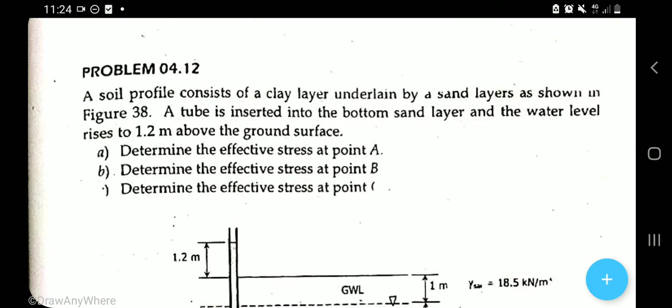A soil profile consists of clay layer underlain by a sand. So meron tayong soil profile, merong clay layer at merong sand. Dalawa yung ating soil layer, isang clay at isang sand. And layer as shown in the figure 38. Yan yung natin. So yung clay nasa ibabaw and yung sand nasa ilalim.

Okay, and a tube is inserted. So as you can see, ito yung tube natin. Yan, yung may 1.2 na yan, ito. So inilubog hanggang dun sa may sand layer, okay? And a tube is inserted into the bottom sand layer and the water level rises to 1.2 above the ground surface.

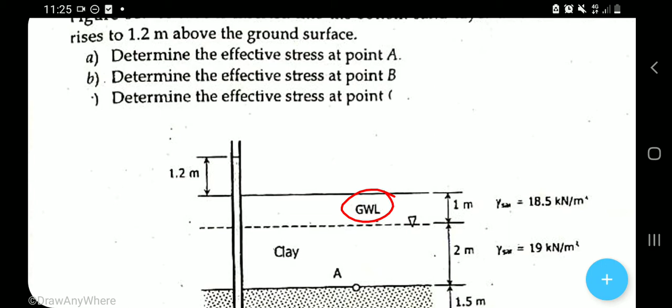So nung nilubog daw yung ating tube, ang nangyari ay tumaas yung tubig hanggang doon. Nung sinukat ay merong 1.2 meter from the ground level. And given sa figure, yung ating GWL or the groundwater level. So initially, yan yung kanyang groundwater level.

At tandaan nyo na kapag kailangan ay mga effective stress, mga stresses in soil, kailangan niyang ating mga unit weight. Unit weight ng bawat layer. If it is saturated unit weight, moist unit weight, or the buoyant unit weight, kung anong given.

So in this problem, ang given ay saturated unit weight sa part ng sand ay 17 kN per cubic meter. Sa sand layer yon. And 19 kN per cubic meter dun sa clay below the water level. Okay, below the water level. Ito, hanggang dito lang yung kanyang saturated unit weight.

At nasa figure na itong 18.5 ay dito sa part ng above the water level. So below 1 meter ground, yung ating tubig. And 18.5 kN per cubic meter yung saturated unit weight nung clay layer doon.

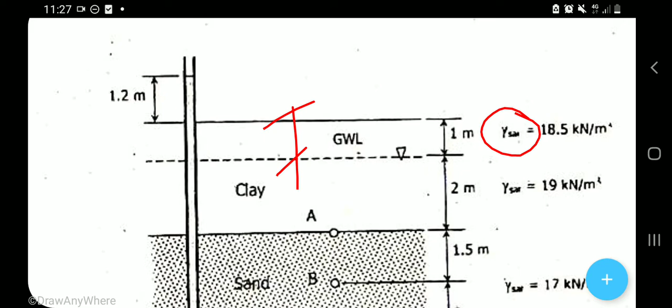Okay, kung natatandaan nyo, magiging fully saturated yung kanyang unit weight kapag lubog sa tubig. So dito sa problem na to, hindi in-indicate kung ito ba ay 100% saturated. Pero ang nakalagay dito is saturated unit weight, meaning to say, fully saturated siya. Hindi lang sinabi kung due to capillary rise, the clay layer above the water level being saturated, fully saturated. Hindi sinabi. So i-assume na lang natin na dahil sa capillary rise, nagkaroon ng 100% saturation dito, so 18.5 kN per cubic meter.

So sometimes there is no capillary rise, so minsan yan ay moist unit weight lang, mamasa-masa lang. Pero dito sa figure, ginawa niya kasi na saturated siya.

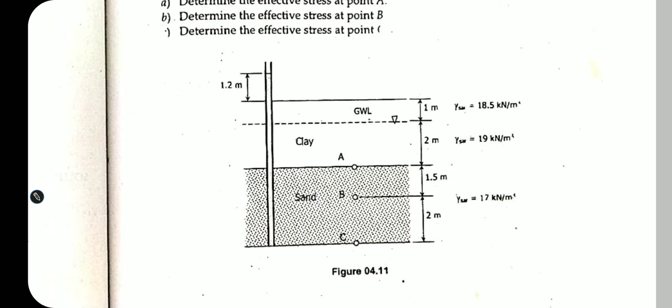Okay, and meron tayong mga point dyan kung saan pinapahanap yung mga stresses natin: point A, point B, and point C. So analyze natin kung ito ba ay without seepage or with seepage. Tandaan nyo na without seepage siya kapag yung water dito, halimbawa, ay lumibel doon sa groundwater line natin. So without seepage yon.

Pero pag ganito, ang nangyari dito ay mas nagkaroon ng head difference, head difference between the groundwater level and the reading dun sa tube. So meaning, meron diyang pagdaloy, may hydraulic gradient yan, may pag-flow of water dyan sa ilalim. Ibig sabihin, may pressure dun sa ilalim dito. Okay, so yung clay kasi parang mas nag-serve siya as semi-impervious material layer, kaya nagkaroon siguro ng pressure difference, yan.

So kapag ganyan, ang tendency niyan mas tumaas dito, ibig sabihin yung flow of water dun sa ilalim is pataas, upward seepage. Kumbaga ano, so gaya nung diniscuss natin na kapag yung water level dun sa piezometer o kaya kung anong tube ay mas mataas dun sa original groundwater level, ang ibig sabihin nun ay yung flow or seepage is upward.

While kapag naman mas mababa, halimbawa, hanggang dito lang siya, hanggang dito lang yung tubig, and the original line level is hanggang dyan, so mas mababa doon, ibig sabihin the flow of water or the seepage is downward. Okay, but this time in this problem, upward seepage siya. And during the upward seepage, tinatanong tayo ano daw ang effective stress sa mga point na yan.

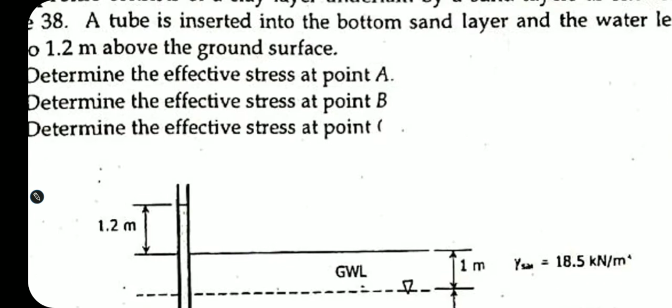Yan, ano yung effective stress sa mga point na yan. So determine the effective stress at point A, point B, and point C. Okay, unahin muna natin sa point A. We all know that the effective stress is the difference between the total stress at any point and the pore water pressure, or the neutral stress, or the stress induced by water.

So dito, sa point A muna tayo. Okay, and since merong head difference dyan, so hindi natin pwedeng hindi lagyan din ng tusok na tube. Kasi kailangan nating malaman yung pressure head difference dyan. Okay? Kasi upward seepage siya, malamang sa malamang ay tataas ang tubig dyan pag tinusukan natin ng tubo dyan. Okay? And yun ang kailangan natin kasi kailangan natin yung pore water pressure para makuha yung effective stress. Yun ang i-minus mo di ba?

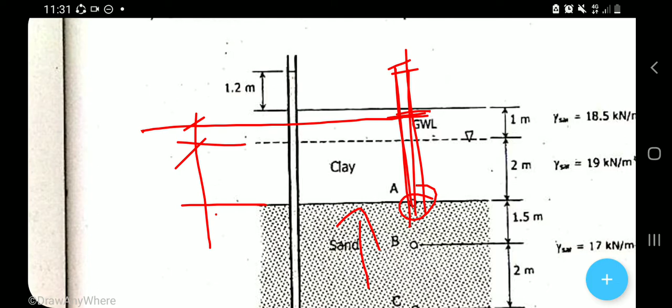And para makuha yung pore water pressure at point A, so kailangan natin ng head reading dyan. Head reading. Kailangan mong malaman to - yung difference ng level dito sa tube na ilalagay natin and the original groundwater level. Ayun, yung maliit na yan. Kailangan nating malaman yan, H sub A, sabihin na lang natin ganon. And ang kailangan nating head para makakuha yung depth para makuha yung pore water pressure at point A, so kailangan natin yung total height niya hanggang dun sa point A na yon.

So sabihin na lang natin na H prime A ganun. So basta yan kung ano man yung gamitin. So tusukan natin. So ganito yung mangyayari diyan. Nagtusok siya ng tubo sa point A lang muna tayo, and the tendency of the water level inside the tube is to rise. Kasi upward seepage siya, to rise. So assume natin na yung H sub A ay ayan, H sub A - yan yung head difference between the groundwater level and the head reading at the tube na inilubog dun sa point A.

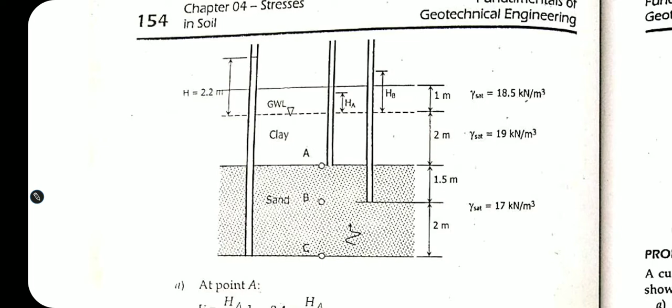Yan. And para malaman yan, so by continuity equation, yung ating hydraulic gradient is the same sa lahat. Yung I dito, hydraulic gradient dito sa part na to, is the same doon and the same also doon, kahit saan - continuity equation yan. So at point A, ang kailangan muna nating makuha, siyempre, yung overall hydraulic gradient, yung tutok dito sa baba - yung tutok dyan sa baba ay ditong point na yan, yung tube na yan. So kailangan natin kunin yung hydraulic gradient dyan.

So, hydraulic gradient dyan is H over L, difference in head ng groundwater level and yung reading. So 2.2, yung naka-indicate, and over L, yung distance kung saan nag-travel yung kapal nung aquifer, kapal nung layer kung saan nagdaloy yung tubig. And ang kapal nun is pinag-plus-plus niya. So 2.2, ayun, nakita nyo - ito yon. Kasi given yung 1 meter, so ang difference nito is 2.2, di ba? And yung length na kinonsider niya is hanggang dito - yan, yung dinaluyan lang ng tubig.

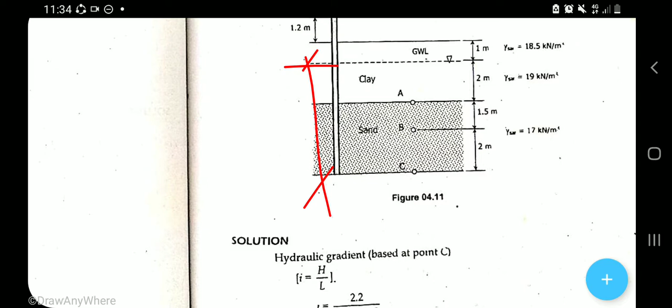So ang pinag-plus-plus niya yan, 2 plus 1.5 plus 2. Yun o, nasa ilalim. So 2 plus 1.5 plus 2. So yung I, yung hydraulic gradient natin is equivalent to 0.4. Tama? 0.4. Okay? Kasi yung dinaluyan ng tubig natin is ito - water level hanggang doon. Okay, so H over L.

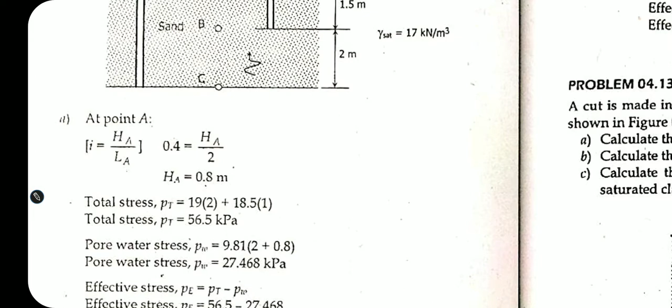Okay, and then 0.4, ano. Tapos dapat yung hydraulic gradient natin is the same for all. So i-equate natin yung hydraulic gradient dito sa part na to, dito sa point A. So HA over yung L na ito, and that is 2 meters. So HA over 2 multiplied is equivalent to 0.4. HA over 2 is equivalent to 0.4. So therefore, to find the value of H sub A, we have to multiply 0.4 by 2. So 0.8 meter - 0.8 meter yung difference in head dito between the groundwater level, GWL, and the head reading dun sa tubo inside the tube.

Now pwede na nating ma-determine yung effective stress. Bakit? Kasi nakuha na natin yung line dyan, yung level ng tubig dyan sa loob ng tube na itinusok dyan sa point A. So ito yon. Okay, pag nakuha natin yung H dyan, so pwede na nating makuha yung pore water pressure - unit weight ng water lang times yung H na yan. So, pore water pressure yon.

So how about the total pressure at point A? So again, dito tayo titingin, simula doon sa taas hanggang pababa doon sa A. So unit weight nito, multiplied by 1 meter, and then plus unit weight nito, multiplied by 2 meters. Yun yung total pressure pa lang yun. Balik - yan o, tama. So 19 times 2, that is the unit weight dun sa clay layer, and then 18.5, clay layer din siya, kaya lang above the water table. So tama, yan yung total pressure. But the effective pressure yung target natin.

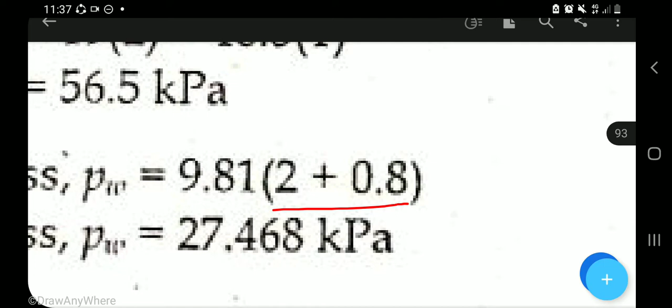So kailangan nating hanapin yung pore water pressure. So 9.81 times yung height. Okay, 2 plus yung HA. Ano ba yung HA na nakuha natin? That is 0.8, so 2.8. As you can see, 2 plus 0.8 multiply by 9.81 unit weight of water, and we get 27.468 kilopascal yung ating pore water pressure.

And the effective stress is the difference of the total and the pore water pressure. So ito na yung sagot: 56.5 minus nyo lang yung 27, yan yung effective stress at point A.

Okay, so how about at point B naman? Ganun pa din yung process. Tutusukan ulit natin hanggang dun lang sa level ng point B. Tusok ng tubo, and nung binasa yung ating reading dun sa tubo, ang difference of the GWL and the head reading is HB. So gagamitin ulit natin yung hydraulic gradient na 0.4.

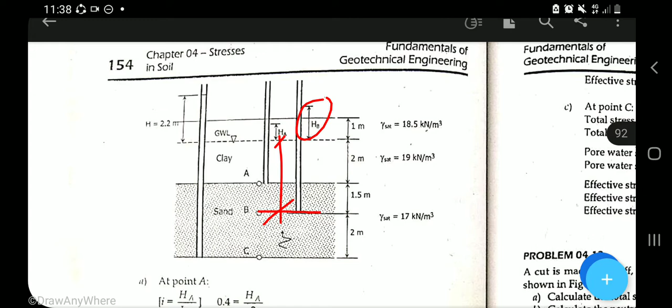Then this time is HB over yung dinaanan ng tubig. Yan ay 1.5 plus 2, so 3.5. 1.5 plus 2, 3.5, and then multiply by 0.4, so 1.4 yung magiging reading doon.

Ano, 1.4, so kung 1.4 ito ay 1 lang, mas mataas doon sa ground level natin. At yun na yung kailangan natin para makuha yung ating pore water pressure. So pamula doon hanggang dun sa babang yun, hanggang point B, yun na yung total depth na kailangan natin i-multiply sa 9.81 or unit weight of water.

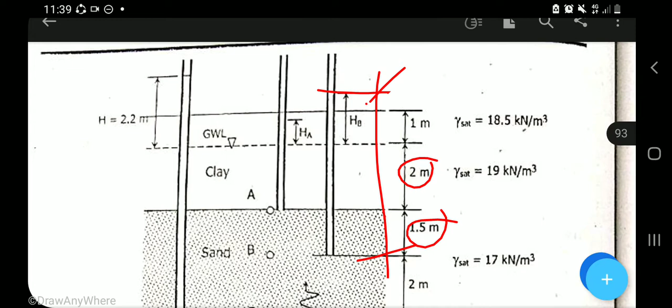Para makuha yung neutral stress, so 1.5 plus 2 plus yung HB, multiply by 9.81, yun na yung pore water pressure at point B. 3.5 plus yung HB na 1.4, times 9.81. We will get the pore water pressure 48.069 kilopascal.

Okay, ito yung kailangan nating i-minus doon sa total pressure. And the total pressure doon sa point B, tingnan ulit natin sa figure. Pamula ulit doon sa pinaka-ground level, pagbasa ng pressure, pamula doon hanggang doon sa baba. Unit weight dito sa part na to ay 18.5 kN per cubic meter multiply times 1 meter.

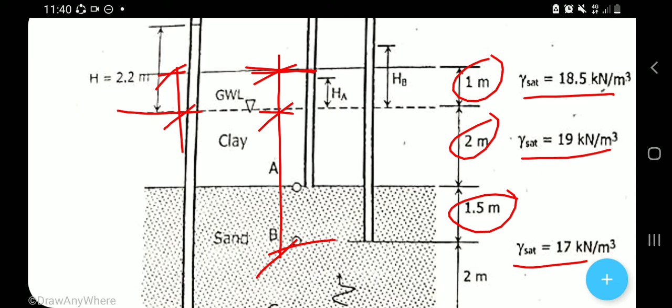At nandito na tayo sa part na to, 19 kN per cubic meter multiplied by 2, and 17 kN per cubic meter multiplied by 1.5. Yun yung total, total stress at point B.

Okay, to find the effective stress at point B, we have to take the difference of the total stress and the pore water stress, so minus lang, ganun lang kasimple. At lalabas sa sagot ay 33.931 kilopascal, kung tama yung pagpindot.

Now at point C naman, tumama yung point C ay sa bottom, so tumama na dito, no need to find the H. Given na eh, ito na yung given, ito na yung basa niya eh. Okay, so all we have to do is apply the concept of the pore water pressure computation.

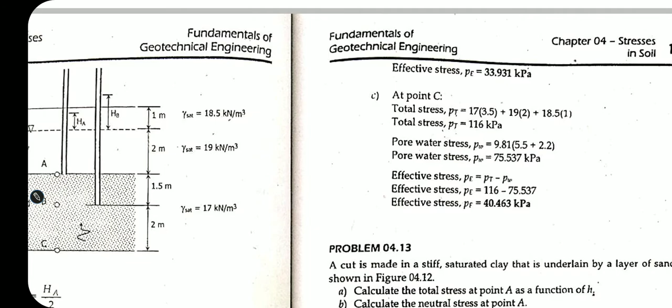So total pore water muna. Subukan natin, pore water pressure, so 9.81 yan, multiplied saan? Dun sa total depth hanggang dun sa point C sa pinakailalim. At yung total niyan is ilan yan? 2 plus 2, ilan yan? 4 plus 2 plus 2, 4 plus 1.5, 5.5 siya, at then plus natin yung 2.2, yun lang yun.

Then multiply lang natin yan, so pinlus lang yung 2.2 dun sa 5.5, then multiply sa 9.81, we will get the value for the pore water pressure, P sub W.

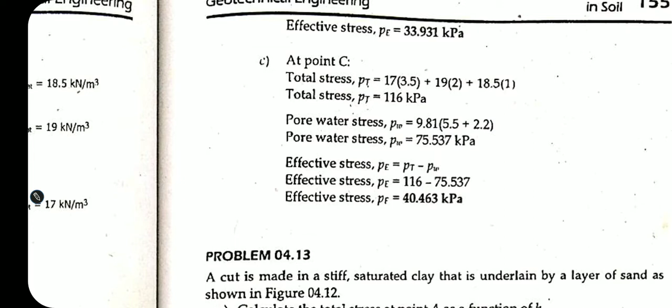At yun yung kailangan natin i-minus dun sa total pressure. Ngayon, paano ulit? Total pressure, paulit-ulit lang po. At point C, the total pressure is pamula ulit doon, pababa. So 18.5 multiplied by 1 meter plus 19 multiplied by 2 meters. Nandito na tayo sa part na yan, and then 17 kN per cubic meter multiplied by yung 3.5, 2 plus 1.5, so nandun na tayo sa point C.

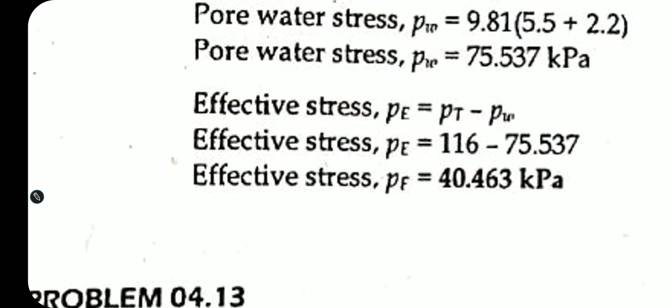Okay, yun yung total stress. Nakikita nyo, di ba? Ito, 3.5, 2, and 1. Yun yung total stress, and then yun yung maminusan natin ng pore water pressure. And then we will get the effective stress at point C equal to 40.463.

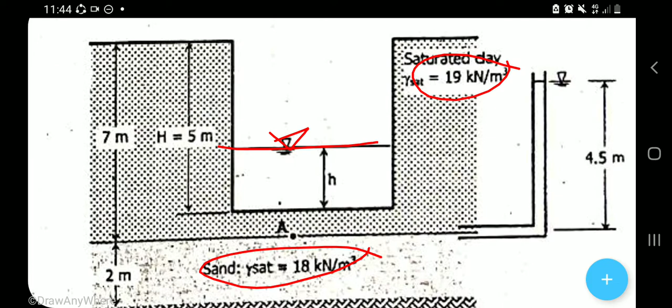Okay, as shown in the figure, given the figure. So saturated clay has a unit weight of 19, and the saturated sand is 18 kilonewton per cubic meter. The water in the canal is in function of H. The dimensions of our canal: 5 meters is the height, and 7 meters is the total thickness of our clay, which is saturated by water. The sand has a thickness of 2 meters, with a saturated unit weight of 18 kilonewton per cubic meter.

At point A, a tube was inserted and the reading is 4.5 meters. Meanwhile, the ground water level is just H, in function of H. So the question: calculate the total stress at point A as a function of H.

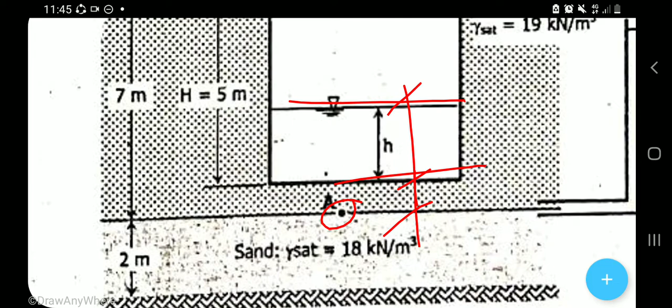Okay, let's get the total stress at point A, in function of H. We don't know H yet, so let's start with the water: 9.81 times H, plus the unit weight of this clay. It's saturated, so 19 times (7 minus 5), that thickness is 2 meters. So 19 times 2, then 9.81 times our H. So our total stress at point A in function of H is given by 38 plus 9.81H.

So that's the answer. Okay, next, letter B.

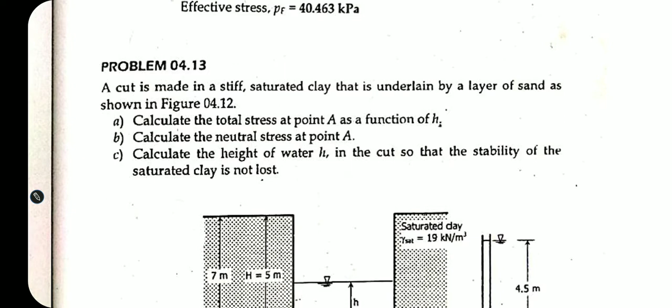Calculate the neutral stress at point A. Neutral stress is pore water stress. Since there's flow or pressure there because it changed, there is pressure and that is also an upward seepage, because this point is higher than that one.

So upward seepage will happen there because there's pressure. We inserted a tube and the head reading is 4.5. To find the pore water pressure at point A, we multiply 4.5 by the unit weight of water, 9.81 kilonewton per cubic meter. That's the answer - very simple. 9.81 times 4.5. Don't get confused, this is not the depth here, because there's pressure - we have to consider the pressure induced by water.

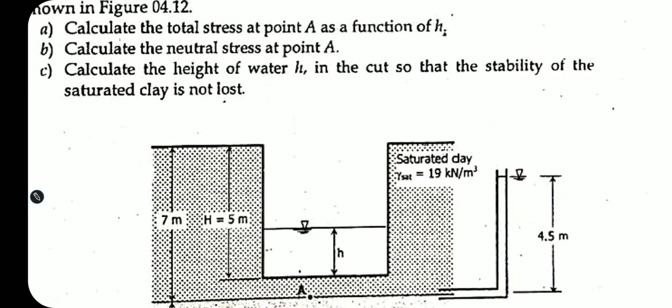The next problem: calculate the height of the water H in the cut so that the stability of the saturated clay is not lost. So we need to find the right height of the water so that our clay does not collapse, so it's not at the critical point.

At the critical point, our effective stress is equal to 0. So the effective stress at that point is equal to 0 - that's P sub E equal to 0. That's where our stability becomes critical. It's the same logic as the critical hydraulic gradient, but this time the condition used is that the effective stress is equal to 0. And the effective stress is the difference between the total stress and the pore water stress at that point.

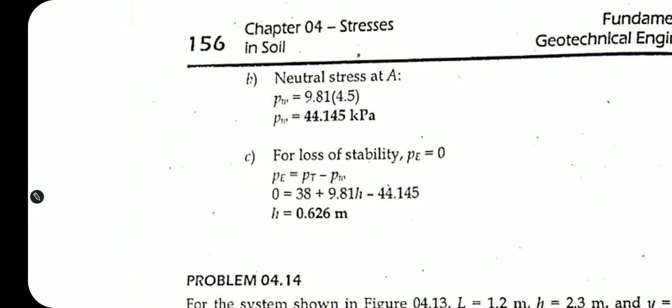So we just subtract them - PT minus P sub W - and equate it to 0. And we will get the value of H, which is 0.626 meter.

0.626. Next problem is for the system shown in figure 4.13. So L is equal to 1.2 meters, H is equal to 2.3 meters, and Y is equal to 1.9. So that's given.

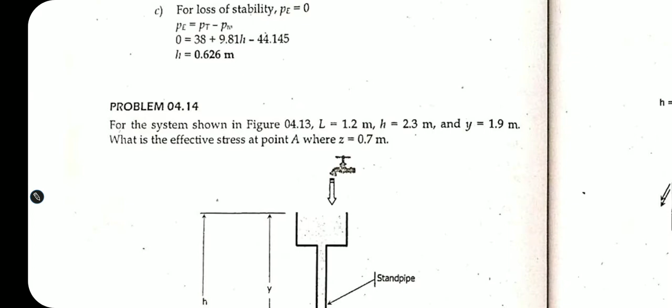There it is, let's place it. So that's our soil testing setup. There's soil inside, having a length L, and a Y that is the depth from the soil surface up to the inlet water surface. And the outlet water surface is up to there. This is our H.

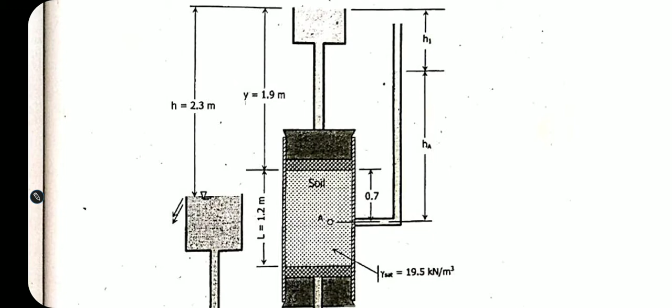So 0.7 is what we're solving for in terms of pressure. Since there is flow of water, there is seepage. So we need to insert a piezometer or tube there, to know the pressure head reading at point A.

So let's get the total stress at point A, and also the pore water pressure at point A. Let's start with the pore water pressure. We need to get the pore water pressure and total stress.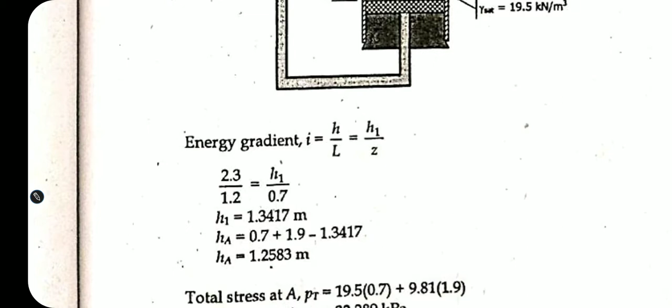The H over L, which is our hydraulic gradient or energy gradient, is also equal to H1 over Z. Where is that H1 over Z? That's the tube pointed at our point A. So H1 over the Z at A, that's the 0.7.

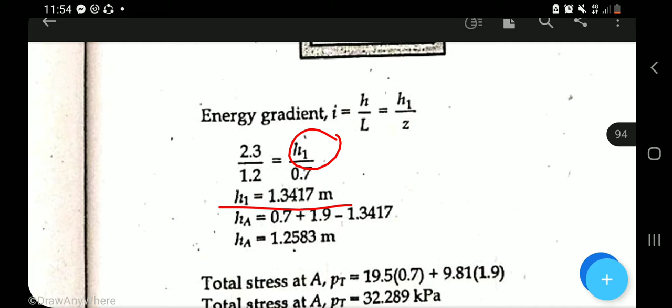Okay, and to find the HA, we need to use the H1. Just plus-minus operations. So to find this, we just subtract H1.

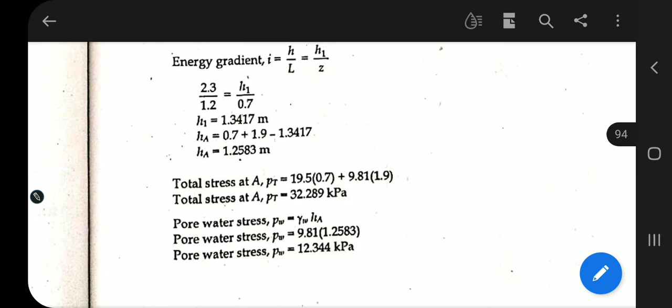Okay? So, but the question is the effective stress. Kailangan natin yung pore water pressure stress. So, that is unit weight of water multiplied by the head reading at this point A. So, ito yung HA times 9.81. This will give us the answer.

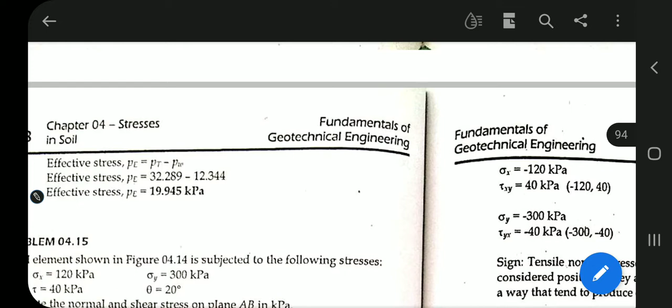12.344. Ayan, 9.81 times yung HA. So, 12.344. Ito yung ima-minus natin doon sa total pressure natin. Minus natin yan and that would give the answer, effective stress ang makukuha natin doon. So, 32.289 minus 12.344. Okay? So, ito na yung sagot. Yan yung hinahanap natin, effective stress at point A during the test. 19.945

kilopascal. Okay, kilopascal. Okay, next problem is this. So, pag sinabing stress in soil, meron tayong tinatawag na normal stress and the shearing stress. Okay, so hindi lang vertical stress, included din yung mga normal stress and shearing stress.

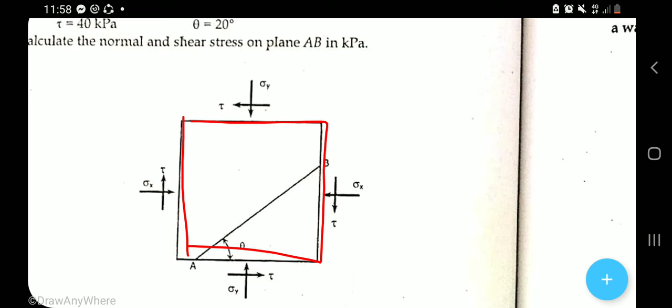Again, from our soil mechanics, the normal stress is perpendicular to the area, and the tangential or the shearing stress is parallel to the area of contact. Yan. So, but this time in soil element, given yung ating stress and yung soil element, ito yung soil element. So, subjected to the shearing stress and normal stress siya.

Subjected siya. So, yung sigma y, that is the normal stress with respect to y-axis. Yan, sigma y, magkaparehas lang yan nasa baba, magkasalungat siya. Okay? Yung ating sigma x naman, yan yung normal stress with respect to the x-axis, kaya sigma x yan. And then yung ating mga tau dyan, yan tau. Ayan yung ating shearing stress or the tangential stress.

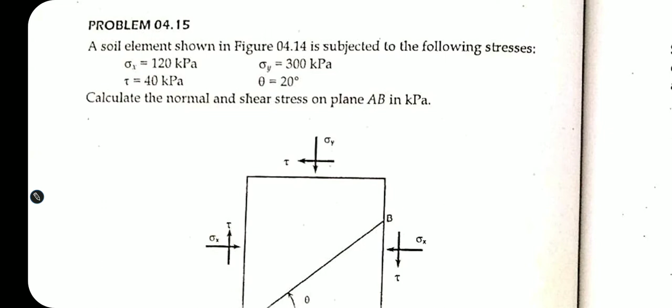And, given yan, naka-given, anong mga value daw niyan, giniven. So, 120 yung sigma, yung normal stress with respect to x. So, yan yung horizontal normal stress yan. And itong 300 kilopascal, yan yung normal stress with respect to y-axis. And then yung tau, yung shearing stress at the soil element is yan, given din, that is 40 kilopascal.

40 kilopascal. Now, calculate the normal stress and shearing stress on plane AB lang in kilopascal. So, nasan yung plane AB? Ayan. So, giniben, ito yung plane AB. Ano daw yung mga stress dyan? Normal stress and yung shearing stress dyan.

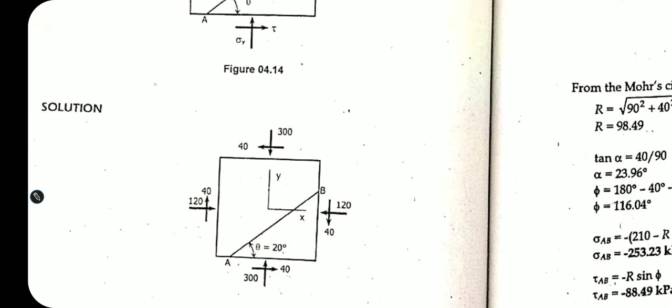Okay? One of the best way to find the key answer is use the Mohr circle. Ayan. Ito, apply natin yung knowledge natin sa Mohr circle. Okay? But this time, unahin muna natin yung basic rules, basic rules pag i-input ng ating mga value dun sa Mohr circle. Okay? So, lagay natin yung XY plane. So, ito yung XY plane. And yung sigma X natin, alin yon?

Yun yung 120. Okay? Sigma X yon. And then yung sigma Y, yun yung 300. And then yung mga tau natin, shearing stress, so parallel siya dun sa surface, dapat. So 40. Yung direction indicated dyan sa figure, yung direction nila. Okay? And take note that pag nagpa-plot tayo sa Mohr circle, yung ating vertical axis will be our tangential stress. Yung papunta dito, pagbasa vertically, yan yung ating tangential stress or the shearing stress.

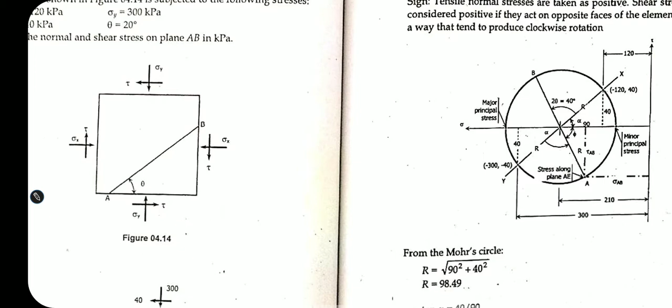Okay? At any some point doon sa soil element. And the horizontal axis natin, dyan binabasa, yung sigma, yung mga normal stress. Okay? And yung sign convention ng sigma natin, is positive kapag compression. Ano pag sinabing compression? Iko-compress niya yung element. So, negative, sorry, magne-negative siya. Just like sa ating mga theory, ang mga mechanics problem, ina-assume natin lagi na positive tension. So, meaning to say, the compression is in negative. So, negative kapag compression, yan.

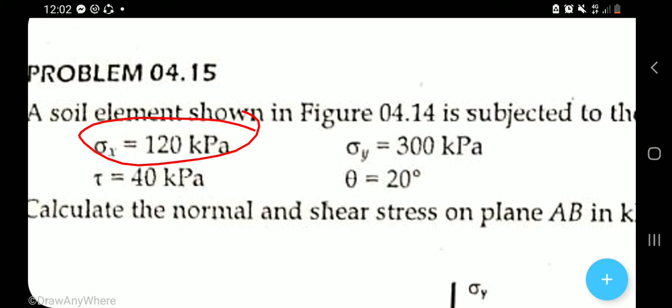So, okay? So, pag ipinalat natin yung sigma y, mga sigma y and sigma x, so, titingin tayo dito. Gaya nung unang point. So, itong sigma x muna tayo. Sa sigma x and yung shearing stress na 40. Okay, i-plot natin sa Mohr circle. Ganito yan. So, ito yon. So, imagine nyo, wala muna nakalagay dyan. Ito yung shearing stress reading and ito yung normal stress.

So, nasan yung 120? Okay, so nandito sa point na yun. Yun yung 120. So, negative siya because compression. Okay, negative siya. So, pagpapunta doon, positive yan. Positive sigma, positive normal stress. So, but this time ay lahat dito kasi sa figure ay compress lahat, pa-compress. Compress. So, negative siya. Tama? And then, yung shearing stress nakatapat nun. So, bakit naging positive 40?

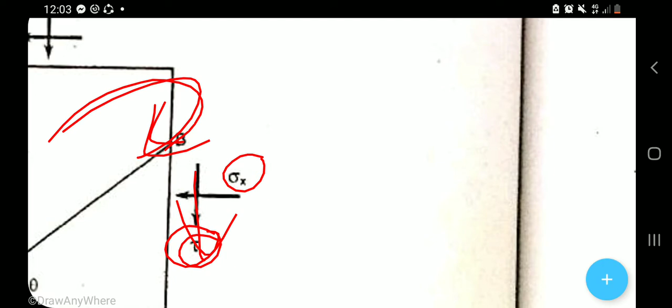Kasi, ang tendency nito, yung sigma x, di ba? Ang tendency ng tau is to rotate the element clockwise. Okay? Clockwise. Itong tau na to, maro-rotate siya. Due to this shear, maro-rotate siya clockwise. So, pag clockwise, positive siya.

Okay? Positive shear. Kaya nangyari dyan is positive shear. Papunta doon, positive. Pero pag pababa, negative shear ulit. So, yung shear natin, ang basahan ay ito, yung vertical axis na yan. And yung normal stress natin, ang basahan ay ayan, horizontal axis natin. Okay? Kailan magne-negative yung normal stress?

Kapag compress. Yung normal stress is to compress the element, so negative siya, negative 120. And kailan magpa-positive naman yung ating normal stress? Kapag pahila. So, compression, ano.

So, how about the shearing stress? Paano naman? Kailan nagpa-positive? Kapag ang tendency nung ating stress na yon is to rotate the element clockwise. Ano? So, positive siya. So, pamula doon, bibilang ka ng 40 units. And yun na yun. So, yun na yung shearing stress doon.

Okay? Dito sa sigma x, ha? Dito, sigma x. Yan. Kasi ang tendency nito is to rotate the element clockwise. Pero kung baligtad yan, kung pa ganon, is counterclockwise ay baligtad ang pababa. Bali, mangyayari, sa halip na pataas yung basa natin is pababa. Ano? Negative 40. Okay? So, na-plot na natin yung unang point.

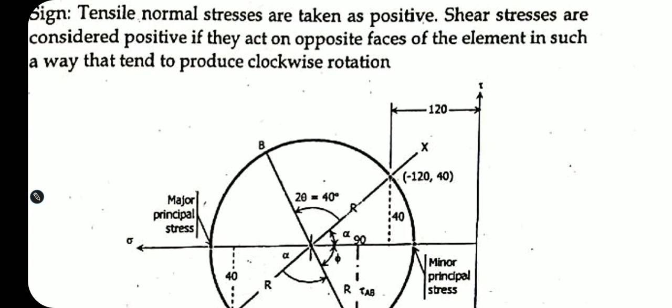And the next is yung with respect to y naman. So, with respect to y, compression ulit yung ating sigma y. So, meaning, ang basa niyan is negative pa rin, ano? Negative pa rin. So, negative 300 pamula doon sa ating origin. Papunta doon, negative 300. Okay? Pagpapunta doon, positive. Pagpahila ay compression, kaya negative to.

Okay? So, how about the shearing stress at that point? So, ito yung kanyang direction. Ang tendency ng shearing stress dito is to rotate the element counterclockwise. Okay? Kapag ganyan, i-rotate mo yung, due to the shearing stress, ang tendency ng element is to rotate counterclockwise, ay negative yung ating shearing stress. That's why ang basa dito is pamula dun sa origin natin, negative 40.

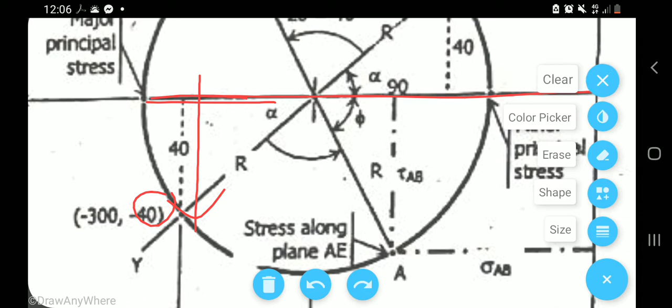Okay? And then, i-connect lang natin yung dalawang point. Yan, connect lang natin. Yan. So, yun yung magiging diameter of the Mohr circle natin. Okay? Yung dalawang point na yon. And,

ang tinatanong kasi, yung effective stress dito, yung stress nga at plane AB. Okay? So, yan. So, yung theta na yan, i-plot natin dito sa theta of the plane. Pamula doon sa linyang to, pamula dyan, ito yung pinlot natin kanina, di ba? So, 2 theta yung magiging angle ng plane AB sa Mohr circle.

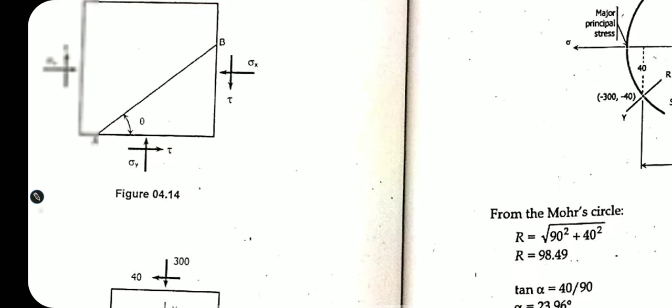Okay, ito yung plane AB sa Mohr circle. So, yung theta na magiging angle doon between the XY plane, itong XY plane na to, papunta doon is 2 theta. Lagi yon 2 theta. Or twice the angle of the plane, with respect to horizontal. Twice nito, so magiging 40 yan. Yun yung angle between the plane, between the axis XY and this plane. So, magiging 40 yan. Always yun, 40. So, kung yun ay 25 degree, so ibig sabihin hindi 40 ito, magiging lang siya, 50 degrees, yan.

And yung ating pag binilugan natin yan, lahat yan, yung mga point na yan, pag binilog natin yan, yung tinatawag nating Mohr circle. And the diameter or the radius, ito yan, radius na yan. And then also equal din ito doon, circle siya. And yung ating part na to, yung point na yan yung tinatawag natin na nandyan yung ating minor principal stress. And dun sa maximum naman, nandun yung ating major principal stress.

Okay? Ito namang mga stress na to, ito ay with respect to x and y axis. Ang hinahanap natin is yung stress dito sa point na ito, sa plane na yan. So, paano makukuha yan? Trigo lang yan. Ang kailangan nating makuha is yung stress dito. Normal stress ito.

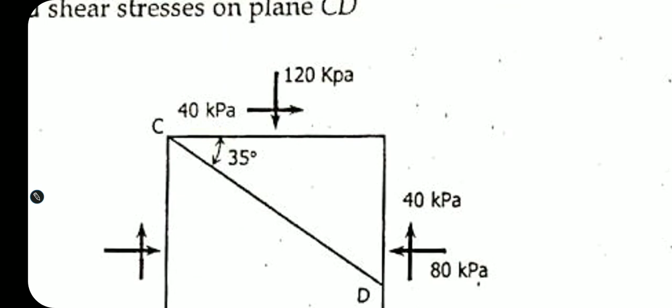As you can see, negative 80 goes there. Negative 40, pababa, kasi counterclockwise - tends to rotate the soil element counterclockwise, so negative 40. And with respect to the vertical axis, y-axis, 120 compression pa din, so negative pa din ang sign niya. And it tends to rotate, this 40 kilopascal tends to rotate the soil element clockwise, so that's why positive.

Afterwards, i-connect natin yung dalawang point na yan. Connect natin, and then draw tayo ng circle. That is our Mohr circle.

I-plot natin sa Mohr circle itong plane CD. Paano ipa-plot? 2 times 35, 70 yun. So 70, that is the inside angle between the plane XY and plane CD. Okay, and ganun pa din yung pagkuha ng mga value.

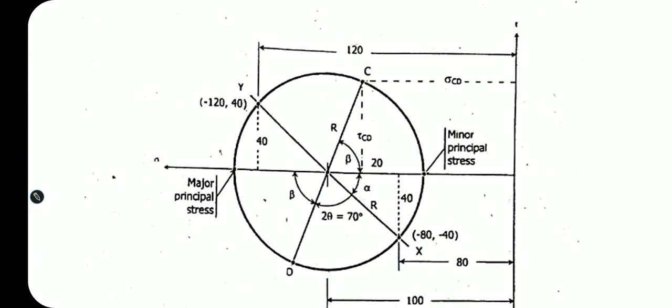Unang pinapahanap is major principal stress and minor principal stress. Pero ang dapat nating makuha muna is yung ating radius. Paano makukuha yung radius? So 120.

So ganito ang nangyari dyan: 120 minus 80, di ba 40. So 40 divide 2, ito na yun. Kaya nagkaroon ng 20 dyan na maliit, kasi 40 itong dalawa.

So yun yung 20. And then, using the tangent, kumukuha na tayo ng alpha. 40 over 20 ang tangent ng alpha, so kuha yung alpha.

So para makuha yung minor, itong major principal stress, and itong minor, kailangan natin kunin yung point nung gitna nung circle muna. Okay, point nung gitna nung circle. And also kailangan natin kunin yung radius nung circle. Paano makuha yung radius ng circle?

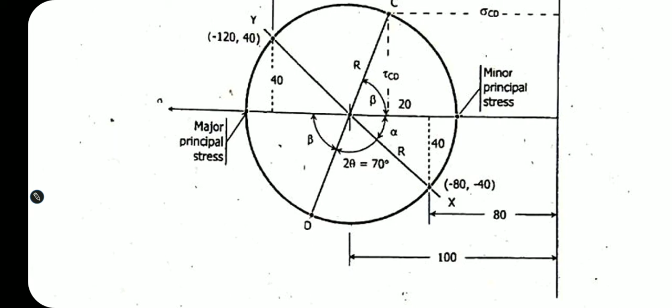40 squared plus 20 squared, square root the answer. Okay, yun yung ating - yan o, yan ang ginawa nyo.

And then the minor principal stress, 100 lang. Paano nakuha yung 100? We all know that in this figure, 80 hanggang dito. Okay, plusan lang natin ng 20, kaya naging 100 to. So yun yung gitna ng ating circle.

So all we need to do is to find the value of the major principal stress and minor principal stress. Ima-minus lang natin pag minor and ipa-plus pag major. Ayan, minus at plus, okay, yung radius na nakuha natin - ayun lang.

Okay, ganun lang kasimple. Now, to find the normal and shearing stress on plane CD. Kailangan natin kunin - ang plane CD, nasaan ang plane CD? Ito, so kailangan natin kunin ito, yung point na yan, yung stress dyan. Paano makukuha yan?

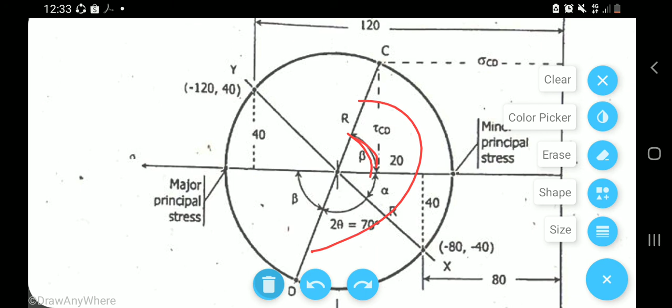Kailangan natin kunin yung beta. Paano ako makukuha yung beta? Yung beta na yan, ang total nito is 180, so maminusan lang natin ng 70 at yung alpha na nakuha. 180 minus 70 minus yung alpha, kuha natin yung beta. Okay? And since meron na tayong R, pwede na nating makuha yung TCD.

Yung tau CD, paano? Magsa-sine tayo. Yung ating TCD would be equivalent to R sine ng beta. Tingnan natin kung tama - R sine ng beta. Ayun, tama, R sine ng beta. Kung ano yung R, substitute lang natin, and kung ano yung beta, substitute. Yung ating tau for the plane CD is 32.474 kilopascal.

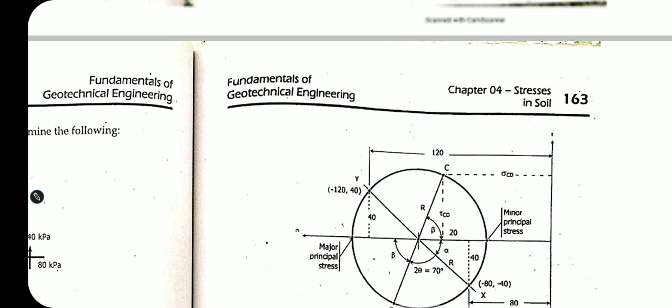So how about the shearing, the normal stress at that point, at that plane? So ito yung hinahanap. Kailangan natin itong maliit na to, so magko-cosine tayo diyan. Itong length na to is equivalent to R cosine ng beta.

At then ima-minus natin saan yan? Dito natin ima-minus sa 100. 100 minus yung maliit na yon, makukuha natin yung ating sagot. Ayan, kaya ganito nangyari: 100 minus R cosine ng beta.

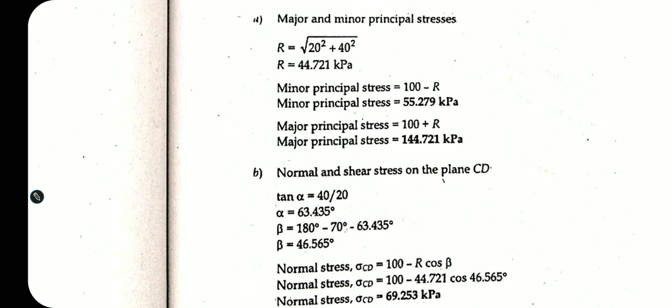And then positive siya - negative. Negative siya dapat, tama, negative siya, so negative dapat to. Papunta siya dun eh. Okay, negative, hindi siya - kasi ang sign nitong 100 is negative, kaya dapat ay negative yan. Basta negative dapat yan, kasi normal stress is to the left siya eh. To the left, negative.

So ganun ang mangyayari dyan. So yun.